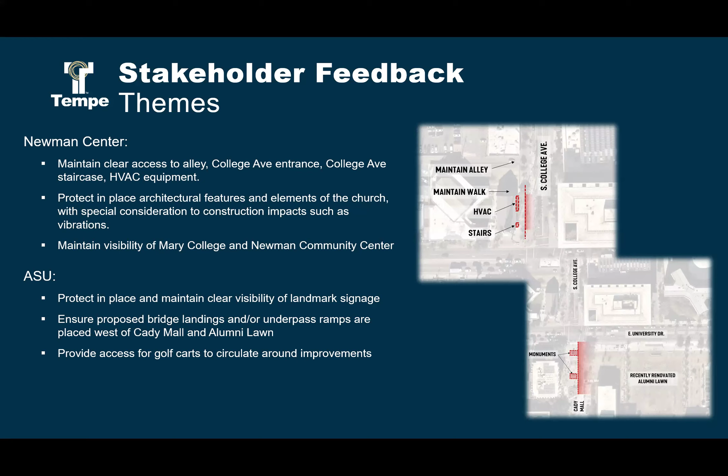And with that, I'm going to hand it over to Jay to discuss further. Good afternoon, everyone. My name is Jay Yenerick. I am the project manager with Bowman.

As Chase just mentioned, this is a really unique location. First and foremost, we're trying to make this a safe location. There's almost 1,000 people that can go through here in a peak hour, and up to 9,000 or 10,000 in a day. So it's a very heavily trafficked area with pedestrians and bikes, and it's very busy. One of the main things is we want to improve the traffic flow so that conflict of vehicles and bikes goes away, which will help the turns be better and improve safety for pedestrians as well.

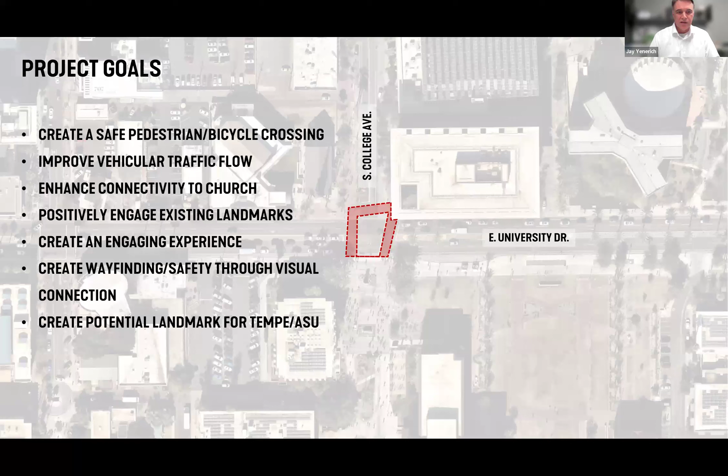We're going to make sure it also blends in with the existing buildings around there, so we're trying to find the nice balance between how it looks aesthetically and its functionality. You'll see the Smith Group renderings later that show that. We'll also make sure it's easy to find and easy to use through great signage when we build this. Lastly, we want to make it a potential landmark for Tempe and ASU. The renderings you'll see show points where you could definitely imagine yourself wanting to hang out, even take pictures after graduation or whatever it could be.

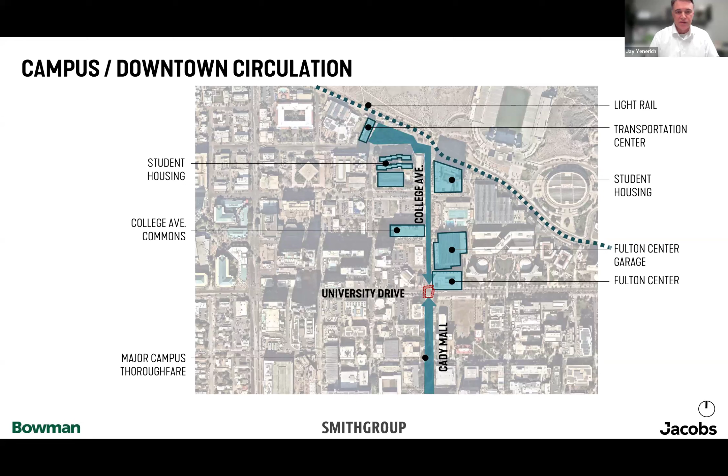As I mentioned, it's really a busy area. It definitely provides a major thoroughfare for the campus off Cady Mall, which distributes throughout campus. There's a lot of student housing and multifamily coming in, as well as the transportation center to the north, so people coming off light rail or any buses at the transit center walk down and go through this area. The Fulton Center is right there as well, so that provides a large population that just wants to cross the road to begin with. Definitely a unique location in Tempe.

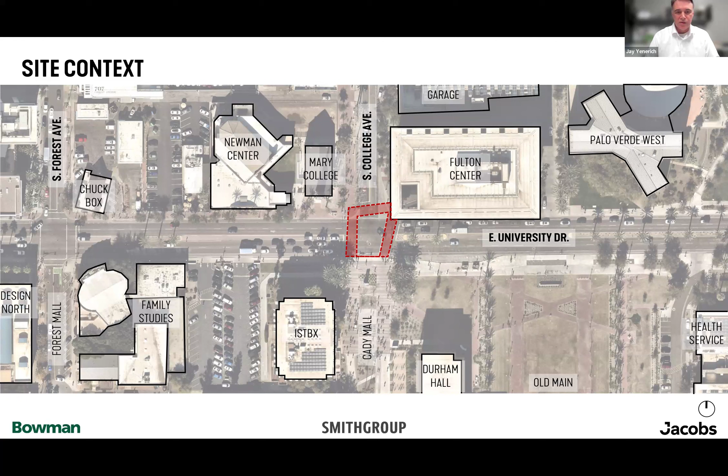Here are some of the buildings within the area that are critical points: the Newman Center and the Fulton Center to the north. That's what Chase mentioned earlier about trying to get early feedback from them. Since it's right on their corners, we want to make sure anything we build aligns with their vision for their facilities. Obviously, as you cross the street to the south, there's a connection to Old Main and the rest of the campus.

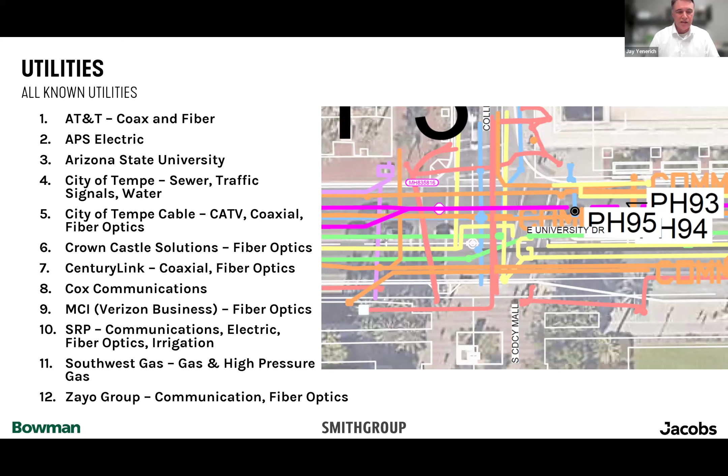Next, I think I'll swing it over to Scott for the rest of the presentation. Sure, thank you, Jay. We wanted to share a few context and precedent images.

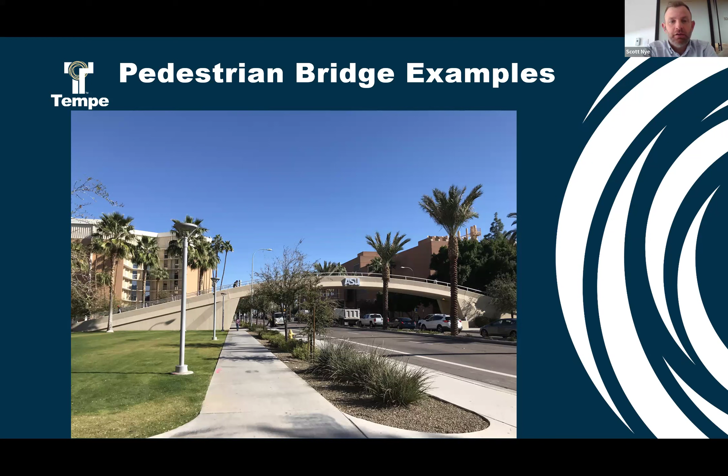Specifically here we have a few bridge examples that already exist along University. The first one is the University Bridge, slightly to the east of our site, and this one has been there for a long time and gets a good amount of foot traffic. Next slide, please. This is a newer bridge, built as part of the ISTB 7 building. To the right in the photo, there's a parking garage connected through this bridge to the education building on the left. This view is looking west towards our site.

Given that we have two bridges, it's pretty rational to think a third bridge would fit in along University here. We did receive some feedback from our earlier meetings with ASU stakeholders and the different commissions we met with, which was that people don't like to climb bridges. Other than the safety factor, most of the feedback we heard was that the tunnel was preferred. But that being said, during quieter times, nighttime or whatever, those tend to be a little iffier for people - they would rather cross the street.

So if we go to the next slide here, we provided some precedent images of different projects that have tunnels incorporated into them. If we go to the next slide.

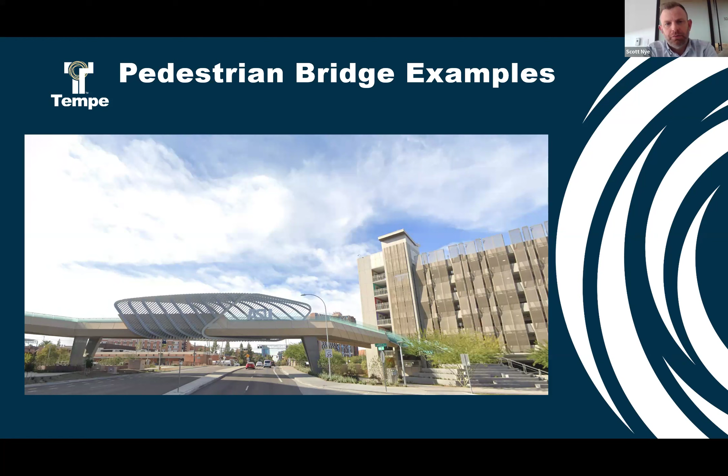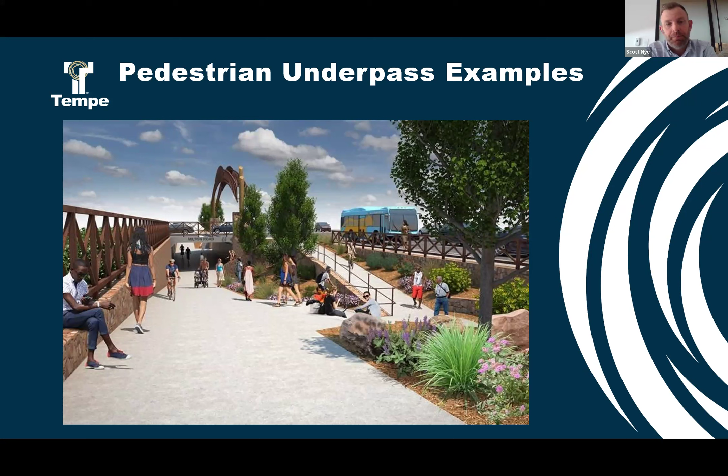If you go to the next slide, please. This is an example down the street here in Phoenix, at the Biltmore Esplanade area, 24th Street and Camelback. Another good example of a well-lit tunnel - they've incorporated art, some nice lighting in there, and again you can see straight through the tunnel, so you're seeing your destination. It feels a bit safer.

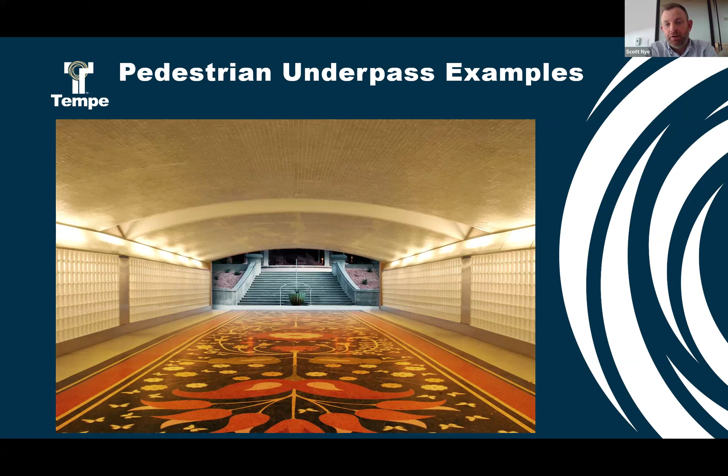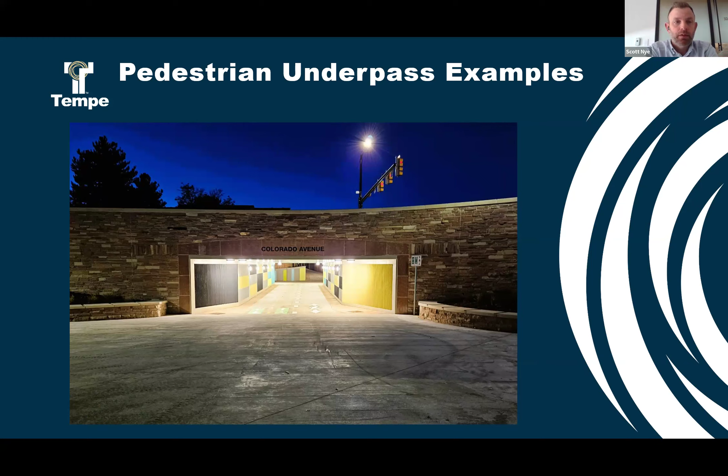Next slide, please. Okay, starting off with the 4 concepts that we've put together here. The first option, as Chase said earlier, is a bridge option. I want to emphasize that the imagery we'll be sharing is very preliminary - some things will not be shown. We didn't show, for convenience, the traffic signal at this intersection that will remain. There'll be an east-west crosswalk on the north side of University that will remain. Things like camera locations, shade opportunities, materiality, color, etc. - all that stuff is very preliminary.

So just wanted to make sure we are prefacing that, as the imagery sometimes can be misleading. Next slide, please. So the first option here, the bridge - we're looking at a plan view, a site plan. The bridge stretches across University there and hugs the west side of College Avenue. The bridge has to be 17 feet clear over University Drive, which means we have nearly 300 linear feet of ramping to get accessible people in wheelchairs, et cetera, up on top of the bridge. So you can imagine that's a lot of ramp to try and incorporate in a small amount of area, especially on the north side of University, College Ave there.

We don't have a lot of runway to keep going north because of alleys and entrances to the church, which Chase had mentioned earlier. So we found a convenient way to tuck part of the ramp under itself on the north and limit how much land we are actually compromising with the ramp on that side.

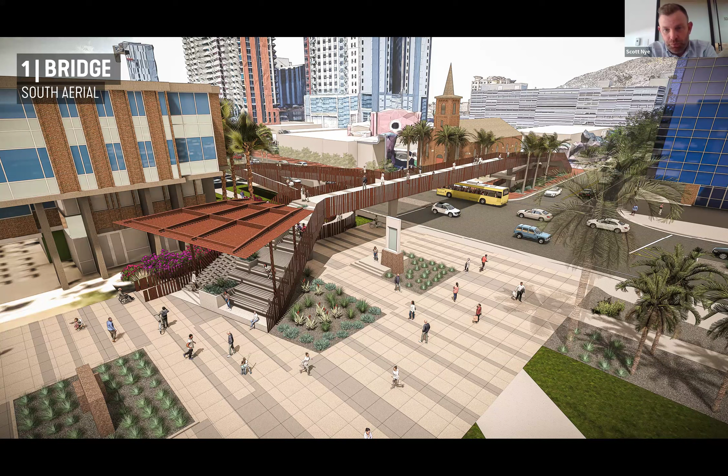So if we go to the next slide here, this is a view looking to the northwest. You can see the bleacher stair and the shade canopy on the left side of the image, and how the bridge would cross over University and then land back down along the west side of College Avenue. Next slide, please.

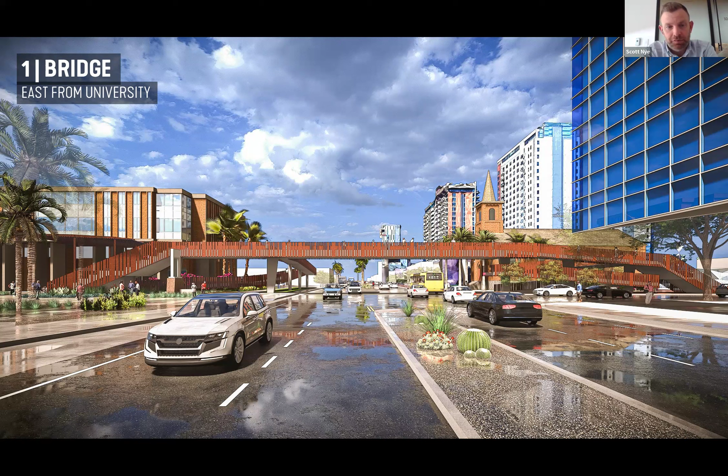This is a view from University looking to the west. You can see how the bridge spans over the street, meeting that 17-foot clear, and touches down on the right side of the screen to the north of University there. And one more slide, please.

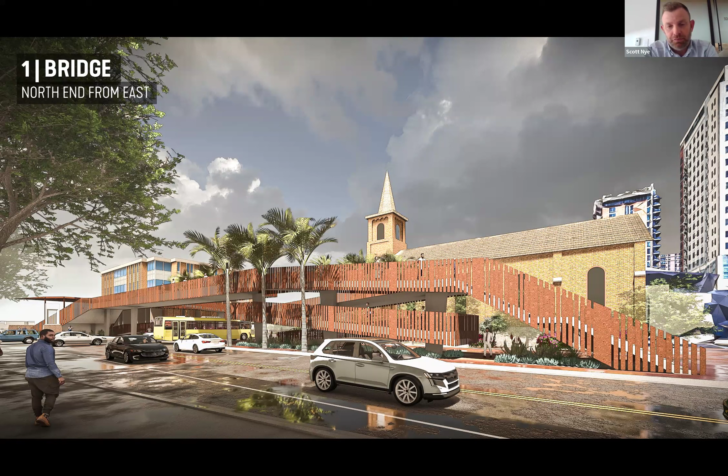This is showing the ramp tucking under itself along the church. Some of the feedback we got from different stakeholders was this was very visually obstructive to the church. So one note, speaking to the preliminary nature of these images, we can work going forward, if this were the selected alternative, to make things more transparent with the guardrail, et cetera, to help it not obstruct the church architecture as much. That's a very important historic building.

Next slide, please. Okay, so the first two tunnel options here, options 2A and 2B, deal with a single tunnel that crosses from the south on ASU's campus over to College Avenue. The first, if we go to the next slide, 2A remains on the west side of College Avenue there, along the church.

One of the big ideas with the tunnels, speaking to making people feel safe, is how do we carve down into the ground and minimize retaining walls that block views and provide areas people can hide, things that make people feel unsafe. How do we minimize those retaining walls and slope grade, work with minimal handrails, to keep a visual connection from people up on the plaza level to people down into the tunnel so you can see where you're going. Another important thing that's really nice about this option is that you get a straight shot through the whole tunnel, so you see your destination and feel a bit safer.

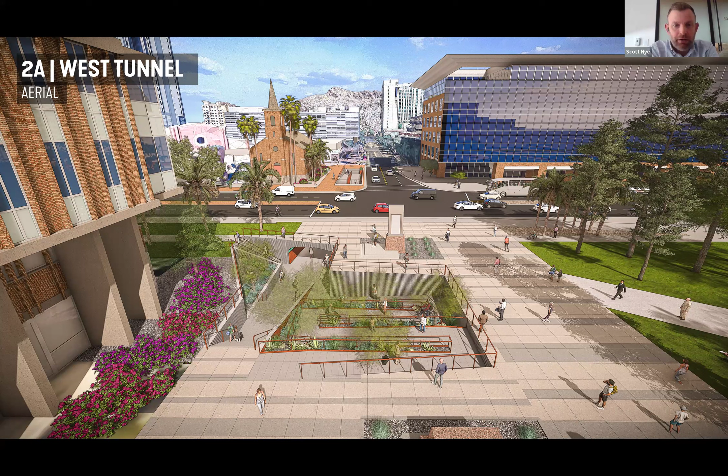So if we go to the next slide, we'll have an aerial image looking to the north down College Avenue. You can see the ramps cut back and forth through there with minimal handrails. You get a good view from there down into the space, which will help people feel safe through there. Bringing natural desert landscaping down into there is a must for us. It will make it feel less concrete, help provide shade down there, and anything we can do to soften that whole experience will help a lot. So if we go to the next slide, please.

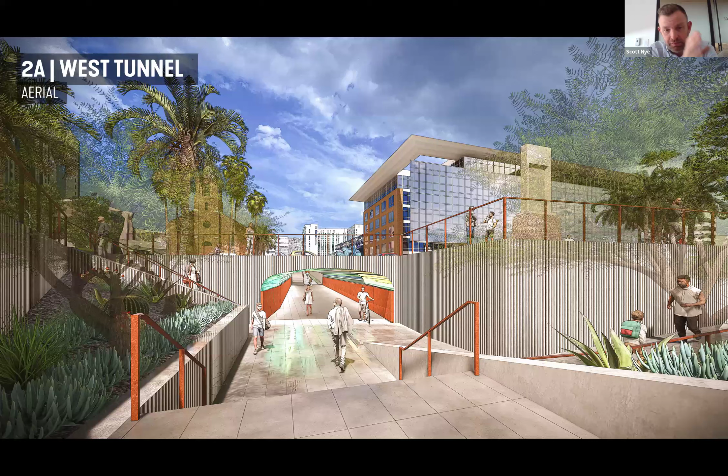This is a view coming down the stairs looking through the tunnel. Again, you can see straight through the tunnel here, given that it's a straight shot. We brought some nice desert landscaping down in there, some trees for shade. It will be a nice experience to cross down into here.

Another thing we feel is a really nice opportunity is that we will be working with a public artist on this project. Integrating either murals or art, light as art, into these tunnels could help encourage people to go down there, as it could be a really engaging experience. Next slide, please.

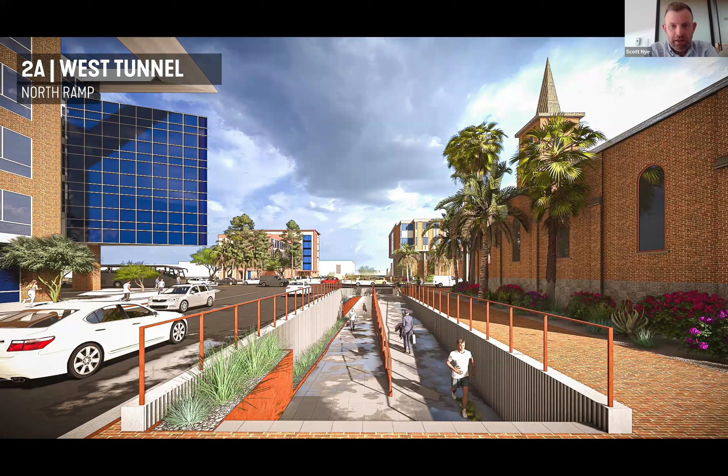This is a view on the north side, along the church here, looking south down the ramp system that would lead you down into the tunnel. In front of us here, it's hard to see, but it's a little more illustrated in the plan. There's a short stair that drops you down to the midway point of the ramp, so it's more convenient if you're coming from the transit center and trying to go under the street here. Anything we can do to encourage people to take this rather than crossing at grade is going to help in these designs. Next slide, please.

Option 2B crosses under University at a diagonal and comes up along the east side of College Avenue along the Fulton Center there. One downside, as you can see highlighted in those red lines and the keynote, is that we will need to realign College Avenue and shift it over to the west to fit the stair and ramp infrastructure in. There's less right of way available on the east side of the street than on the west. So that is one downside.

We have some bus traffic that comes through here that would have to make that turn, and then eventually farther north on College Avenue, curve back into its current alignment. But in terms of the ramp and stair infrastructure on the south, it is identical to the previous scheme. The yellow smiley face here is going down the ramp on the south and crossing under, coming back up on the north. The blue smiley face will be reversing that journey.

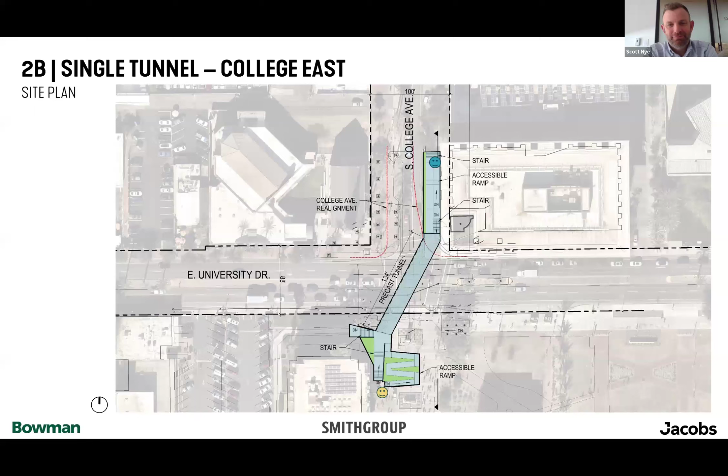Thank you. Okay, so again, a very similar sort of intervention on the south side, on the ASU campus side of things, but on the north side you can see the tunnel here along the Fulton Center, the ramps and the stair that get you down to the tunnel. Next slide, please.

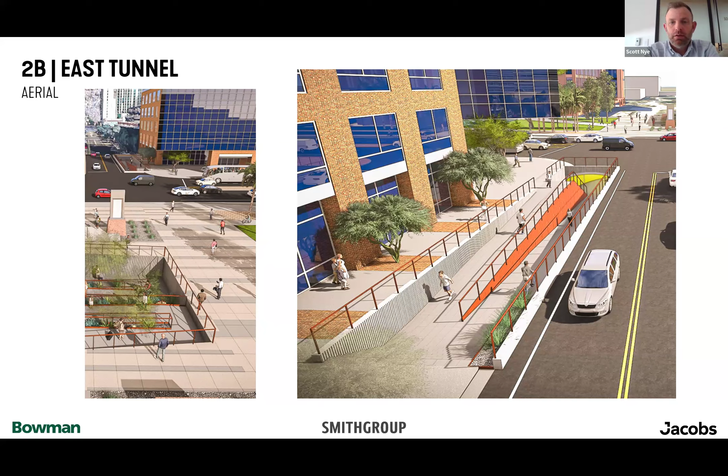The fourth option here, titled Option 3, confusingly, the Y tunnel, was an attempt to really maximize the points of access for pedestrians on the north side of University Drive. Next slide, please.

As you can see here, both the east and west sides of College Avenue will get a stair and ramp in this situation. This makes it a little more flexible. People already on the east or west side of College Avenue won't have to cross over to access the infrastructure. The icons that are moving here will show circulation through.

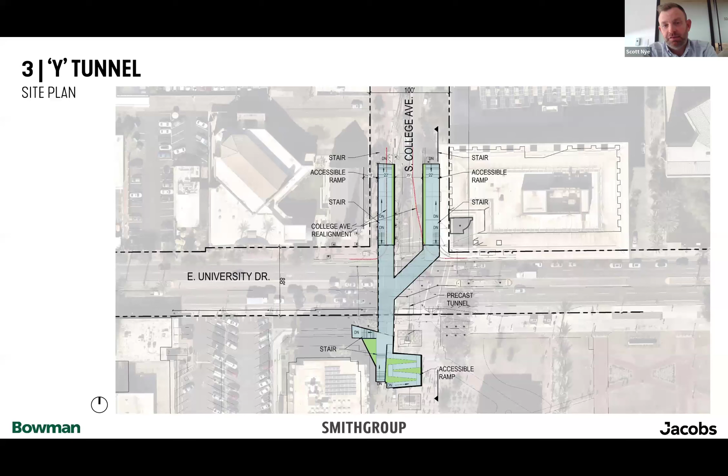Similar to option 2B, because we're putting infrastructure on the east side of College Avenue, we will have to realign the street. As you can see, this gets very tight with all that infrastructure, two sets of ramps, two sets of stairs, et cetera. This is also more costly than either 2A or 2B. And the Y part of the tunnel, the branch to the Y, does create a blind corner in that tunnel that will make it feel less safe. So a few downsides to the Y tunnel, but a positive is that it creates the most efficient and accessible way of traveling if you're headed south across University.

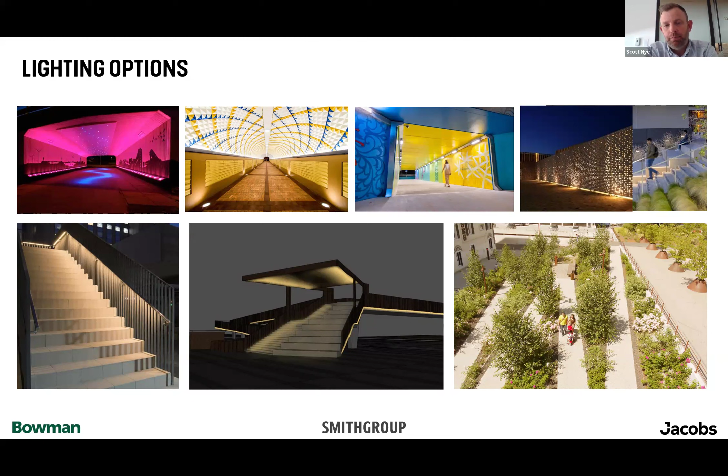So next slide. And finally, here we have some landscape character. Again, the idea of how we're bringing some desert and some planting, some softness down into the ramps, tunnels and stairs that help to soften it. And we're going to have a lot of concrete retaining walls around the perimeter. How do we provide texture and tactility, create some interest there?

And then again, if we ended up with a bleacher stair, that image in the middle is a nice example of how you might integrate small little pockets of a plant here or there to break up the monotony of a big concrete stair. So I believe that's the last slide I have. Thank you.

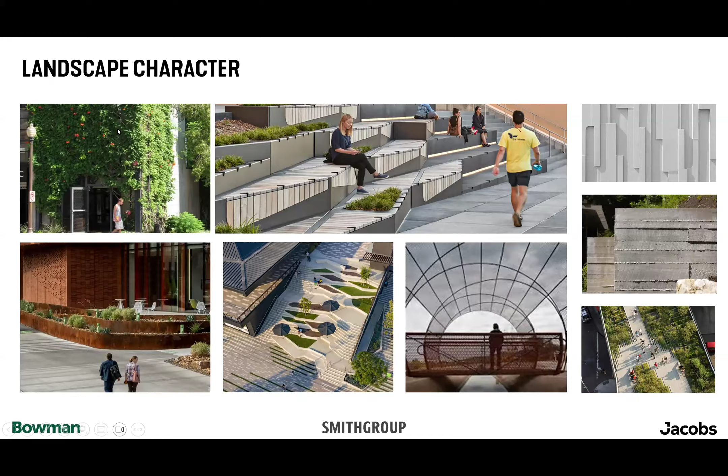As we talked about before, one of the first things we identified was meeting with our immediately adjacent stakeholders. That was prior to going to the commissions listed here. We reviewed these same materials with the Commission on Disability Concerns and got their feedback, with Tempe's Transportation Commission, as well as the Historic Preservation Commission.

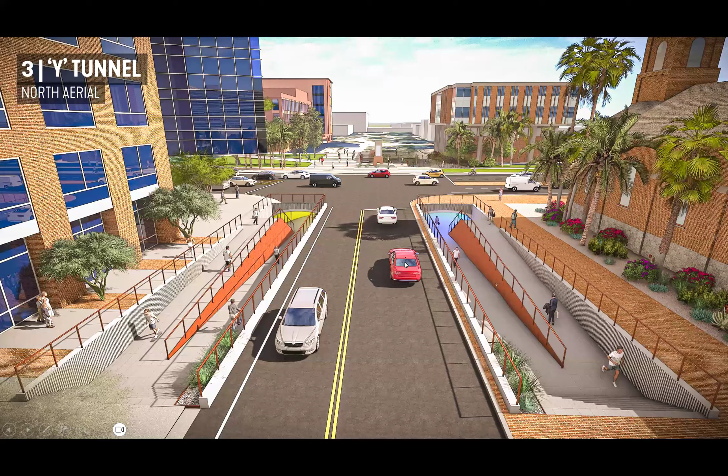This is north on College, right? And maybe show the plan view, Chase or Shauna. There we go. Is that what you're looking for? That's the bridge. Right, so those bicycles are going to be going west on University on the south side, right? You're going up a ramp. Are you talking about underneath the ramp, what kind of circulation we're going to be maintaining? I'm trying to understand because I see two lanes.

I'm just trying to understand which direction the bikes are going to be going because, like I said, you have to ride with the flow of traffic, and it's illegal to ride on the sidewalk. So I'm trying to understand how bikes get from the street to the ramps. For example, on this one, if I'm riding my bike north on College, how do I get to the street where I have to ride because it's illegal to ride on the sidewalk?

Yeah, so with any of these alternatives, we're identifying them as dismount areas, but we will be keeping the existing condition of the bike lanes that are here today. So we'll be maintaining that northbound bike lane that you see on College Avenue in this photo, and the existing bike lanes along University Drive. But it would be the existing condition as far as where you're allowed to ride your bike. Otherwise, if you want to utilize this, then it would be a dismount.

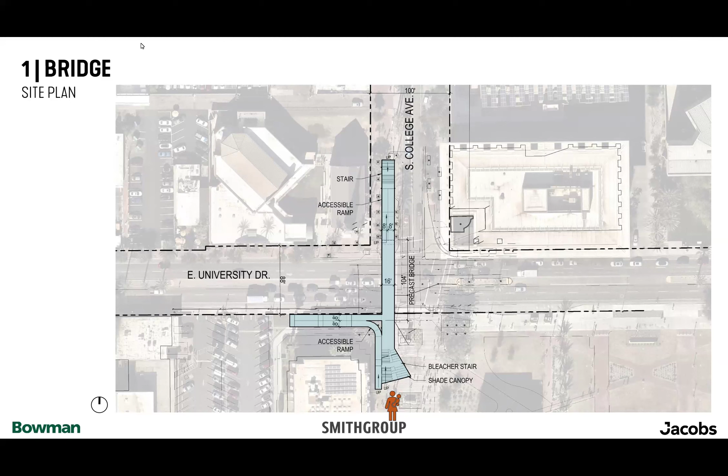Okay, so then my last question is what type of material are you going to use for the hand railing? Because handrails obviously exist for a reason, and I'm concerned that this creates a situation where either I risk falling — I trip on stairs all the time, I have to have a handrail — and I'm going to get my hand burned if I touch a metal handrail. So what material are you going to use?

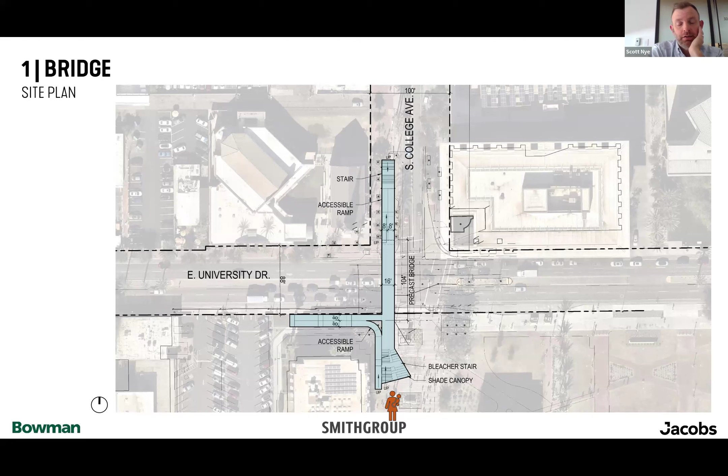It's a great question. I mean, again, speaking to the preliminary nature of the designs, that's something that hasn't been thought through or selected yet. But we will be making those selections with that in mind, given that this is out there and much of it won't have shade protection.

Well, I think my final thought is that I'm really disappointed with this whole project. I don't like it at all.

Thank you for your comments, David. Tim, did you want to go next? And then we have a couple questions in the chat. No, my question was answered.

The next question asks, is this project considered fully funded if the more expensive option is selected? Right now we still haven't developed a final estimate. We have a rough order of magnitude at this preliminary stage. Although we've secured funding for the project's construction and have it programmed in our CIP, we anticipate needing to seek additional funding opportunities, as right now we just have a rough order of magnitude. We'll get a better idea once a preferred alternative is selected and we start doing material selections and specifying landscaping. But we do anticipate needing additional funding to close out the project's construction, so we will continue seeking grant funding opportunities for that.

A follow-up budget question: is Tempe responsible for any of the potential costs? Yeah, so it would be partially funded through the local transit tax for Tempe. There are required local matches with our federal grants. We secure about 94% grant funding, and the additional 5.7% required local match would be part of the city's contribution, depending on the shortfall of the project. If we're unable to get additional grant funding, that would also be identified through local sources. But again, we are pursuing additional grant funding opportunities and hope to be successful. We've been very successful in the past at getting additional funding for these large capital projects. Ongoing maintenance would be funded through local funds as well.